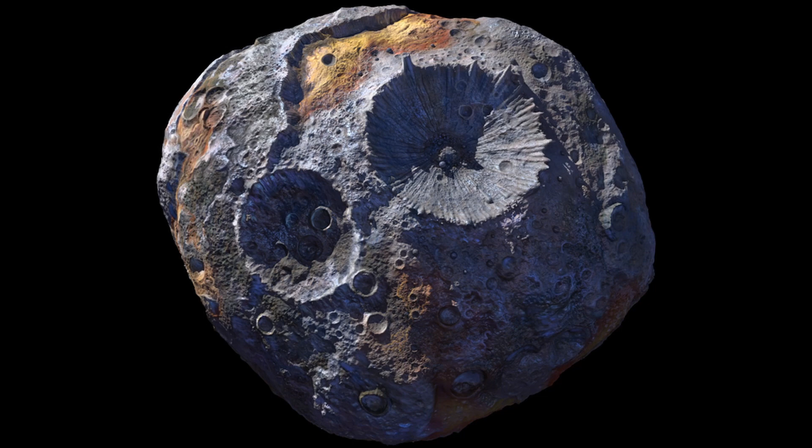300 million miles away, orbiting the Sun between Mars and Jupiter, lies an asteroid known as 16 Psyche. Over the coming years, scientists hope to study some striking similarities that this asteroid shares with our very own pale blue marble.

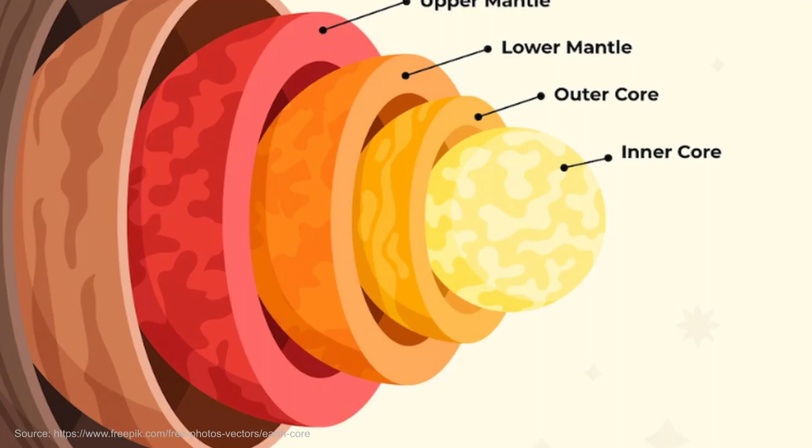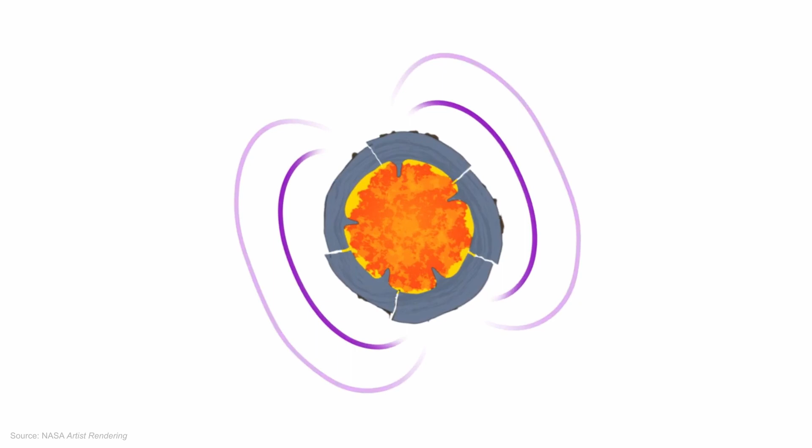It is believed that the Psyche asteroid is in itself the core of an early planetesimal left over from the creation of the solar system. Collisions with debris and other asteroids made Psyche into what it is today.

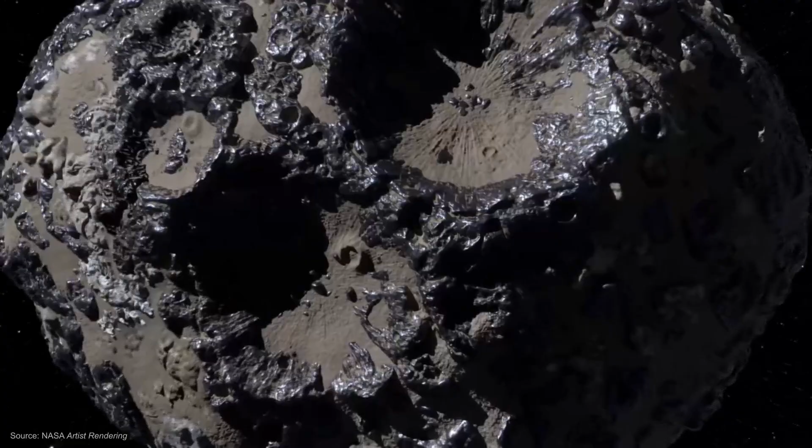It is rich in metals and could hold key answers about the properties and creation of Earth's very own metallic core. It is known to be over 95% metallic and has a diameter of about 140 miles at its longest axis. But other than that, not much is known about Psyche.

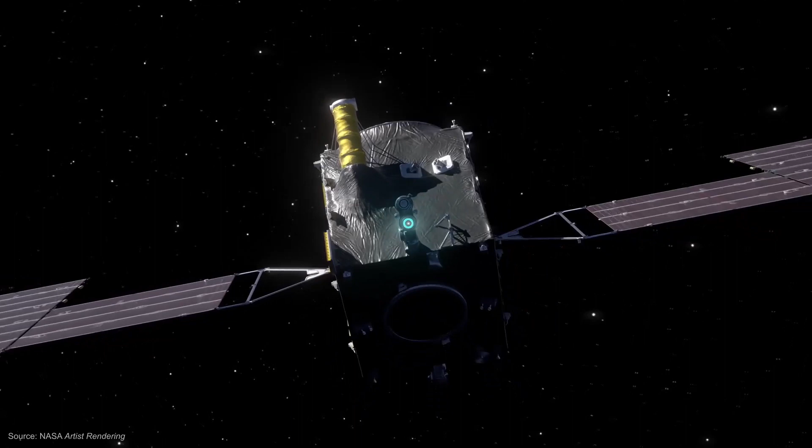Arizona State University and NASA scientists and engineers hope to change this in the very near future. In August of 2022, NASA plans to launch a mission to the metallic asteroid to study some of its properties.

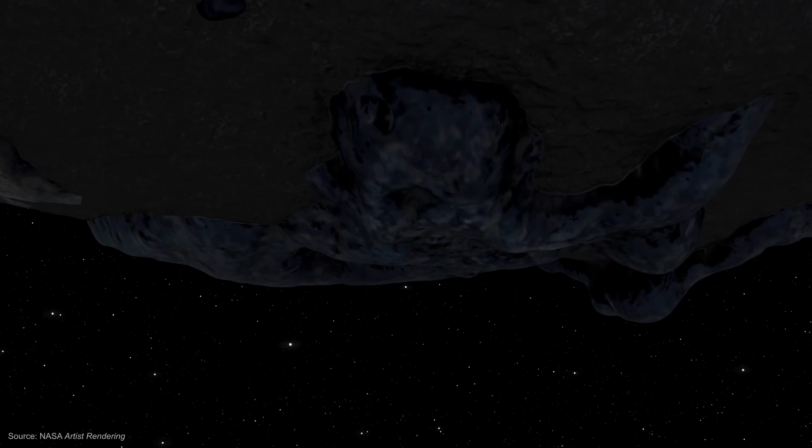Based on the results, the next step is a possible return mission that would include the landing of a rover onto the surface of Psyche, the collection of surface samples, and for the safe return of these samples so that scientists back on Earth may unlock Psyche's secrets.

NASA and Arizona State University challenged colleges and universities to develop a comprehensive mission from start to finish. At Michigan Technological University, 20 students stepped up to the challenge to try their hand at spacecraft development and mission design. Teams were arranged based on the 4 main phases of the mission: landing, sample collection, sample transportation, and sample return.

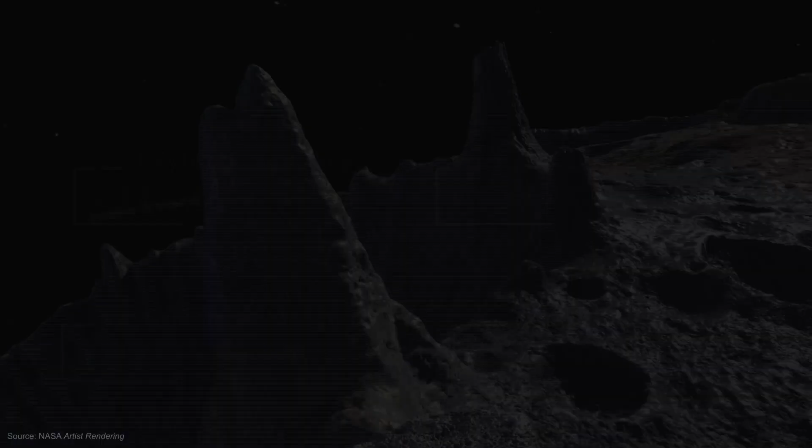Our team's scope involved ensuring the samples remained sealed, secured, and uncontaminated, as well as the transportation of these samples into orbit around Psyche, where they would be collected by a satellite and brought to Earth.

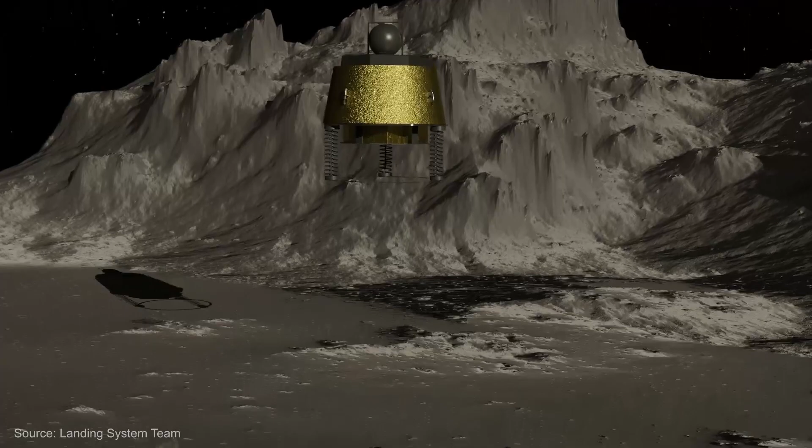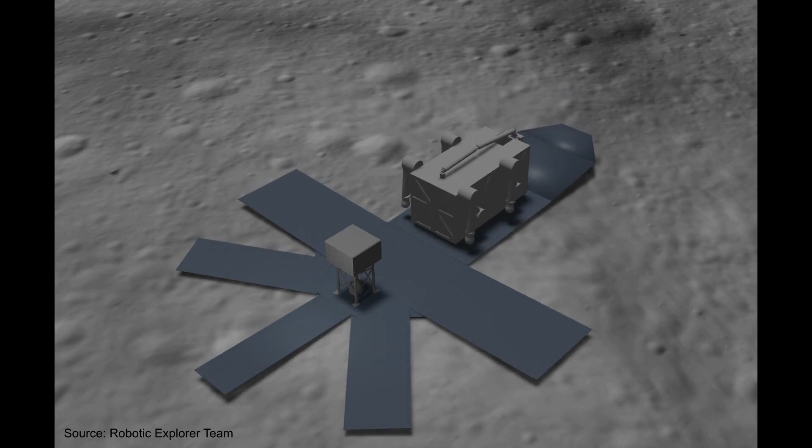The landing team developed a unique payload release mechanism to deposit the rover onto the surface of Psyche. The rover transportation team developed a one-of-a-kind surface traversal method using the low gravity on Psyche to their advantage.

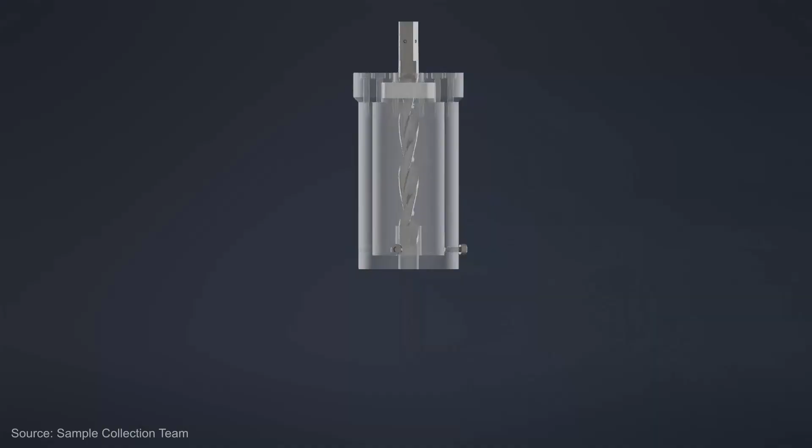The sample collection team developed self-contained cylinders housing drill bits that collect metallic shavings from the surface of the asteroid.

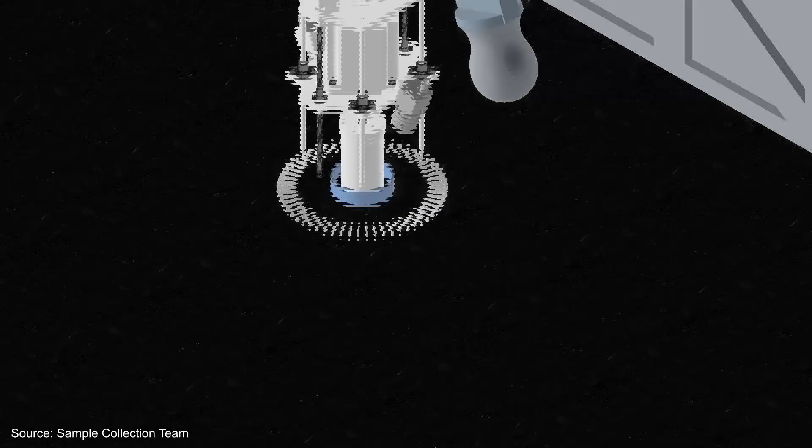Our first challenge was to design a way for the sample collection team to be able to lock their cylinders containing the metallic samples into a vessel that would also prevent contamination.

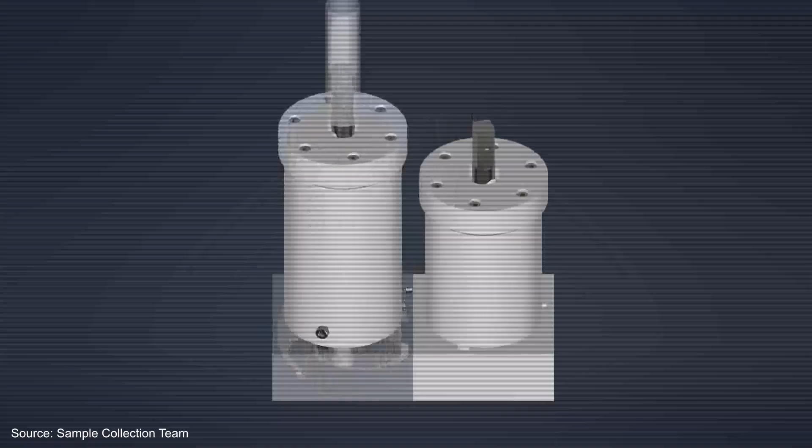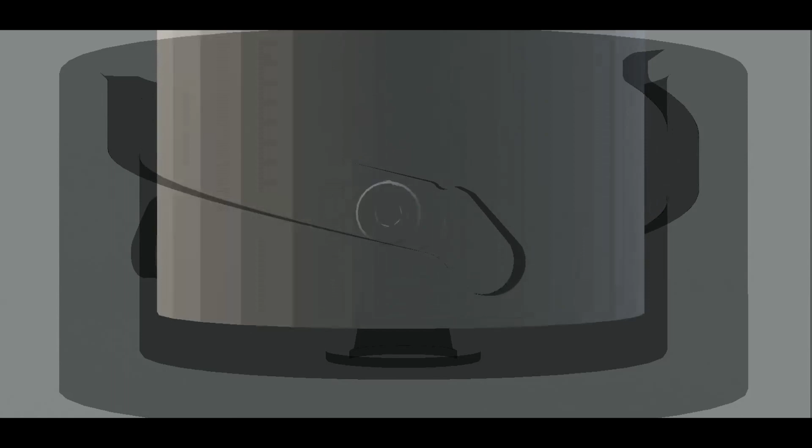Using the premise of a common twist-lock mechanism, our team developed a thread groove with multiple locking points that would allow for the sample cylinders to be placed in and locked or removed completely with minimal effort on the part of the rover team's robotic arm.

Due to the low gravity on the asteroid, these downward-facing grooves eliminate the need for the robotic arm to press downwards with respect to the asteroid's surface.

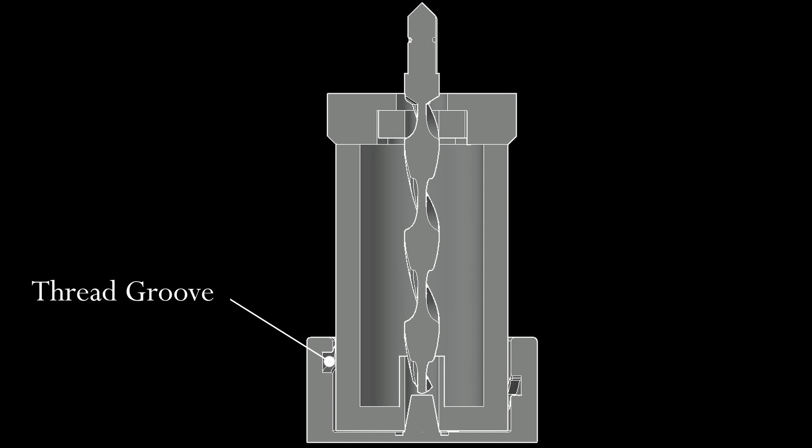As the cylinder is threaded into the base, the drill bit housed internally within the sample cylinder will encounter the small cone in the center of the base. This cone forces the drill bit upwards, which compresses a seal along the top of the sample cylinder.

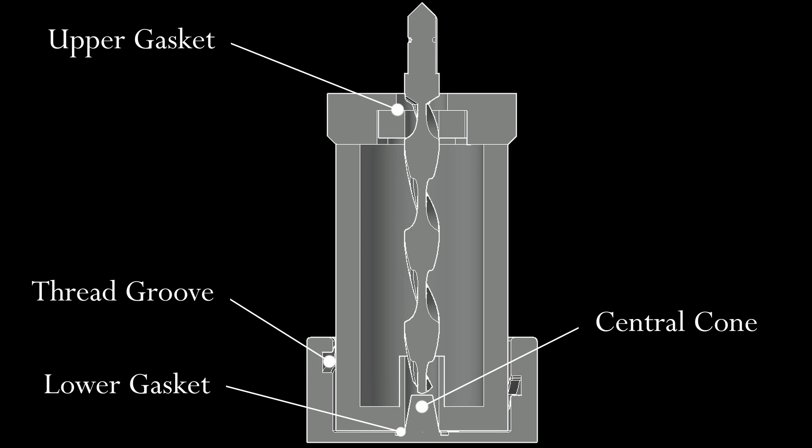At the base of the small cone in the center of the cylinder receptacle, there is a small groove that holds a space-grade seal and prevents air and particle contamination once the cylinder has been threaded into place. This creates a contaminant-free, airtight seal within the entire cylinder housing.

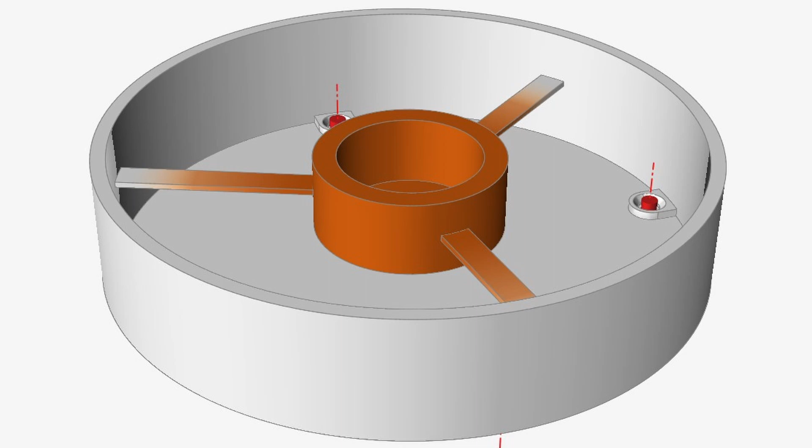In order to verify that the invaluable sample-laden cylinders would not loosen under the extreme vibrations that occur during takeoff and orbiter interception, our team simulated the vibrational properties of the cylinder base. Further physical testing is required to determine the necessary level of damping and to ensure the safe return of these metallic samples.

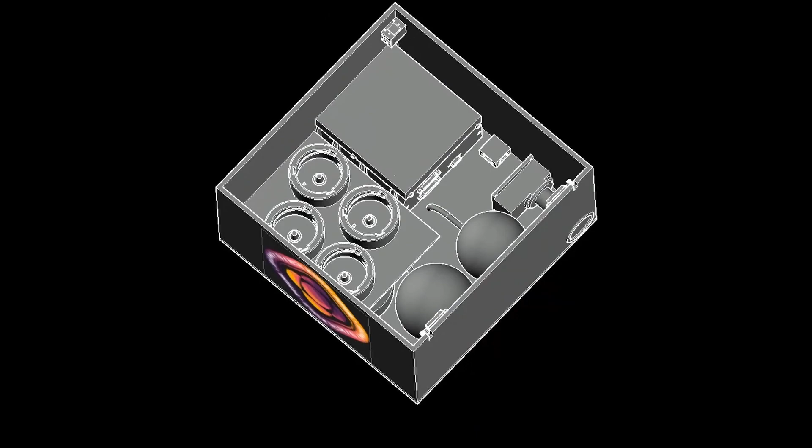The final challenge for our team was to create a launch vehicle that would allow the sample-laden robotic arm easy access to the sample cylinder receptacles within, while at the same time incorporating all of the standard equipment and technology that would bring the vehicle into orbit around Psyche.

Components housed within the launch vehicle include the bipropellant propulsion system and the corresponding oxidizer and propellant fuel tanks, a gyroscope for attitude correction, a star tracker for navigation, reaction wheels for course correction, the power supply, dual motors that enable the functionality of a rack and pinion door, the long-distance communication device, and finally, the receptacles that allow the sample cylinders to be locked into place within the launch vehicle.

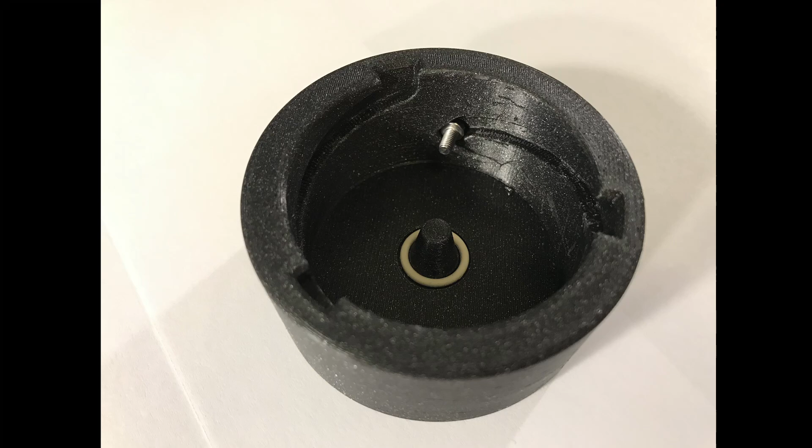In order to progress the overall design and ensure feasibility, our team recommends a few additional steps be taken. Manufacturing the cylinder receptacles out of aluminum by means of manual or CNC lathing or metallic 3D printing would allow for a more realistic approach to physical testing, as well as implementation into the overall design.

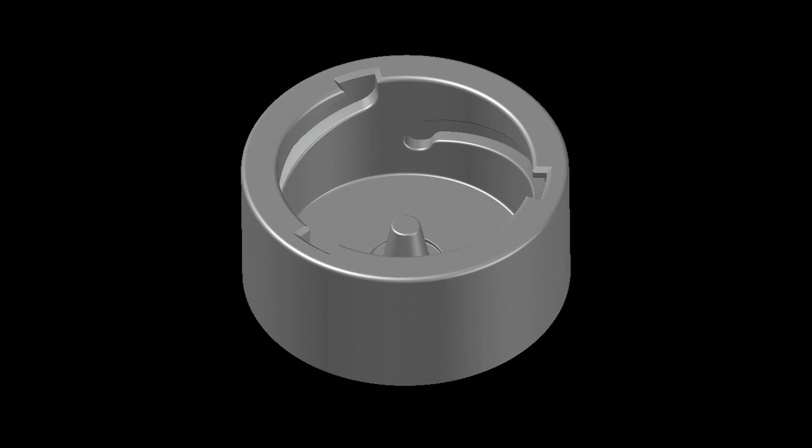This would also allow for more realistic vibrational testing to determine mode location and damping requirements.